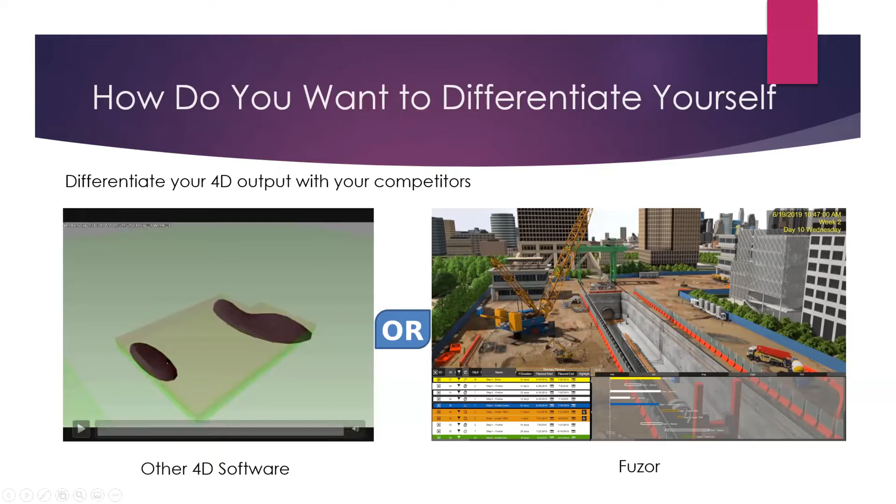Presenting the traditional 4D software, or the one created by Fuzor with full details.

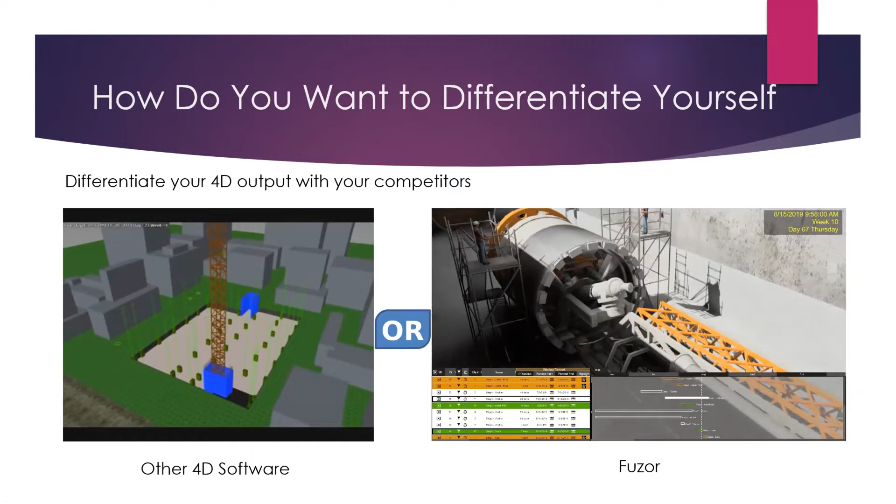Okay, now you may be thinking, oh, I'm given a tight deadline. I don't have enough time to add more details. It is correct if you are using the traditional workflow.

Older workflow requires multiple software throughout the VDC project lifecycle. You use Navisworks for construction sequence simulation, 3ds Max for animation, Lumion for rendering, After Effects for video editing. It may be fine if you don't make any changes. Yet, it is very common to have schedule and model changes. It is very time-consuming and frustrating to go through the whole process of each modification.

It is totally possible to increase your efficiency and productivity by using the all-in-one VDC software, such as Fuzor. You can use Fuzor to create detailed 4D simulation, method statement simulation, site logistic planning, project cost simulation, construction progress tracking.

When comparing to the traditional VDC tools, Fuzor has a stunning graphic to present your 4D simulation to clients clearly. It has a quick and easy equipment animation workflow to save time and cost. It can create 4D with high level of details. It is very user-friendly. You can also learn it quickly.

It also accommodates the needs of the latest developments such as VR and AR. So Fuzor is not just for now. We also take care of your future developments. It also handles large-scale projects. More importantly, Fuzor helps you to win more projects.

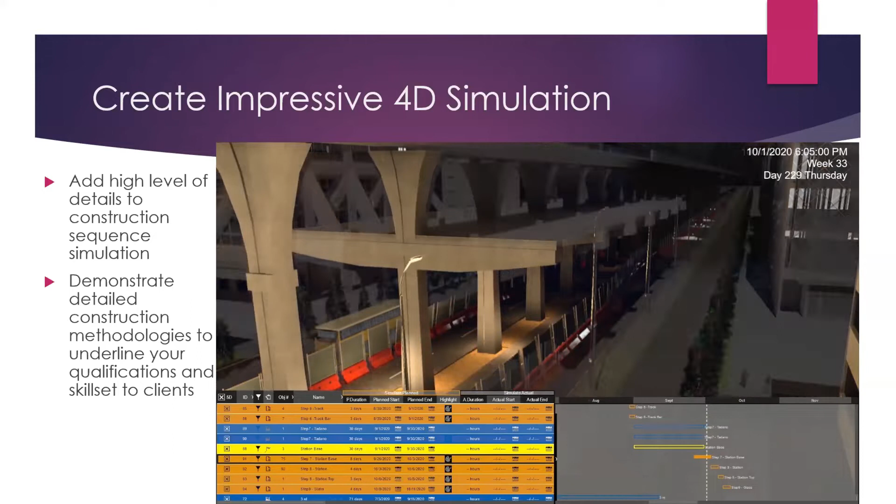Fuzor has a full toolset to generate the deliverables for your projects. Let's go through the Fuzor 4D workflow.

Interoperability of data among various software is always a challenge. You don't need to worry about it when using Fuzor. Fuzor has a good solution to handle it. It doesn't matter if you are using Bentley, Autodesk, or any other tools. Fuzor has a workflow to work with them perfectly. Other speakers will share with you the details.

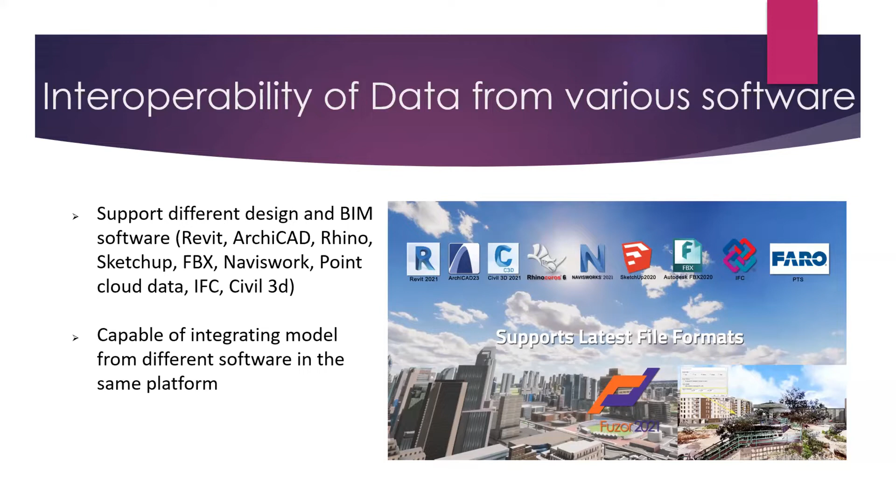Fuzor has a seamless integration with P6, Microsoft Project, and Power Projects. You can load the schedule to Fuzor through XML with all the logical links. You can continuously update the schedule and maintain the linkage between the tasks and 3D models. If you don't want to load the schedule, you can create the schedule from the 3D model within Fuzor.

There are various toolsets in Fuzor to help you select and filter objects quickly and easily. You can use the Auto Assign workflow to help automatically assign objects to tasks. The object filter system of Fuzor is also really robust, letting you set rules to filter the objects.

It is just super easy to learn and create animation in Fuzor. Let's see how you can create a mobile crane animation in 2 minutes.

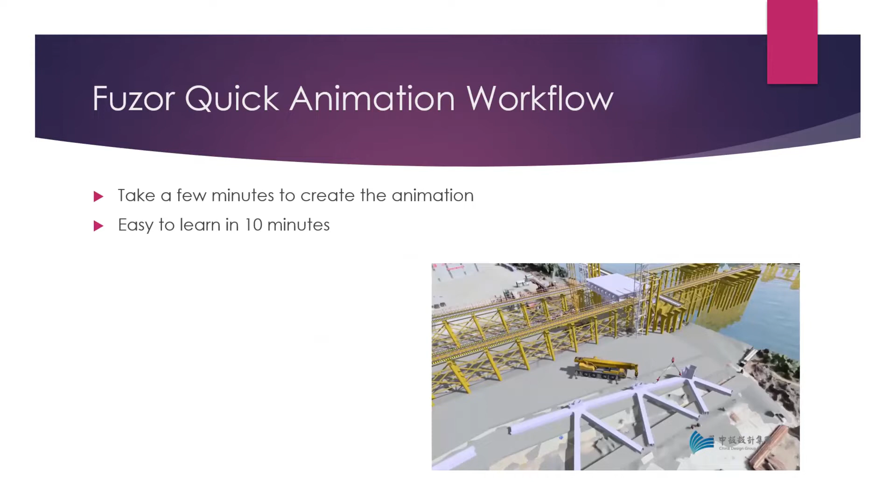Okay, so the first step is that you can create a staging task, and then add the structure framing to the ground. Then you can go to the Fuzor content library and search for the LTM, the mobile crane.

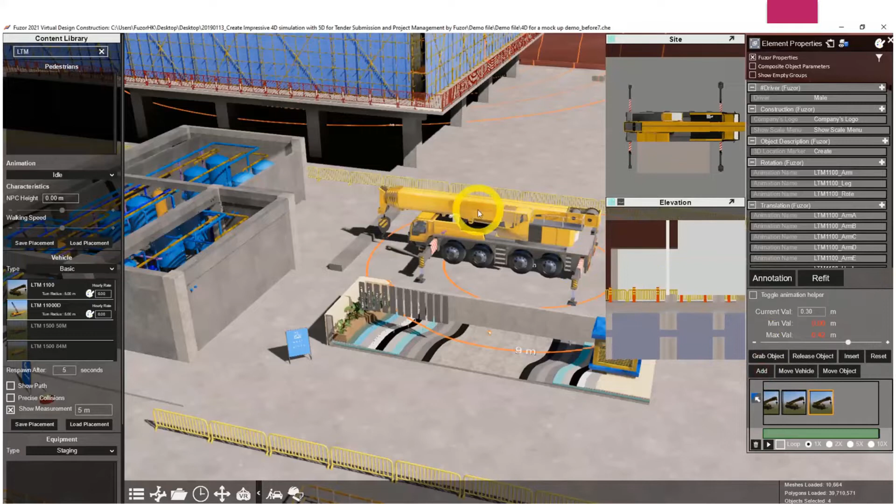For each equipment, it is based on our actual catalog. You can use the rigger flow, select the telescoping section, and adjust it. Then for the operation of the mobile crane, you can see it show the working radius as well, so you can check whether it will crash with potential items or other equipment.

Okay, you just add a keyframe. In order to help you locate the position precisely, there are other windows as well, so you can view it from different angles. This is a top view, and also the elevation view.

After you finish the animation, you can create an equipment task and turn the animation into simulations. This controls when this mobile crane will operate, supporting precision up to minutes or seconds. You add it to the equipment task, so the mobile crane will operate starting on the start date and complete on the end date.

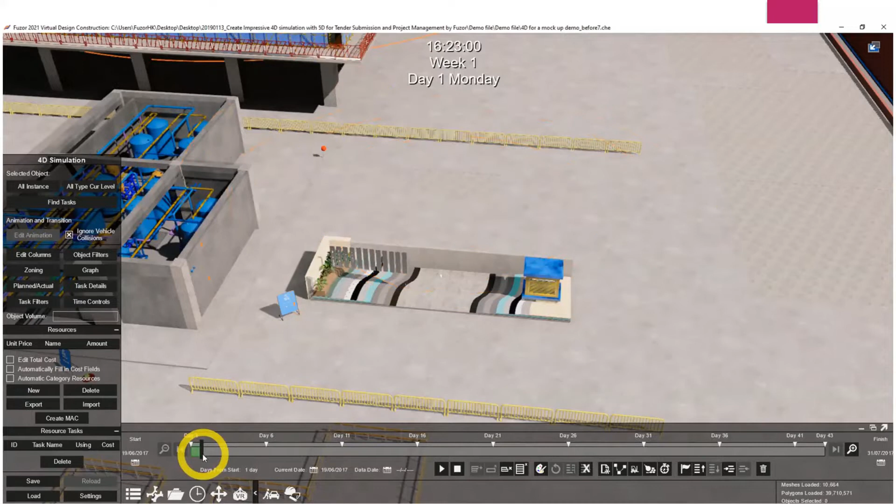So why can you do it so quickly? It is all because Fuzor offers an extensive construction vehicle library that comes with adjustable animation. The equipment is modeled based on the actual catalog. Not only can you use it to create method statements, but also to simulate the operation of the equipment on the construction site. So this is an example.

Check out this video, how you can simulate the operation of the excavator from the driver view. You can find the panel to control different parts of the equipment, same as the real equipment.

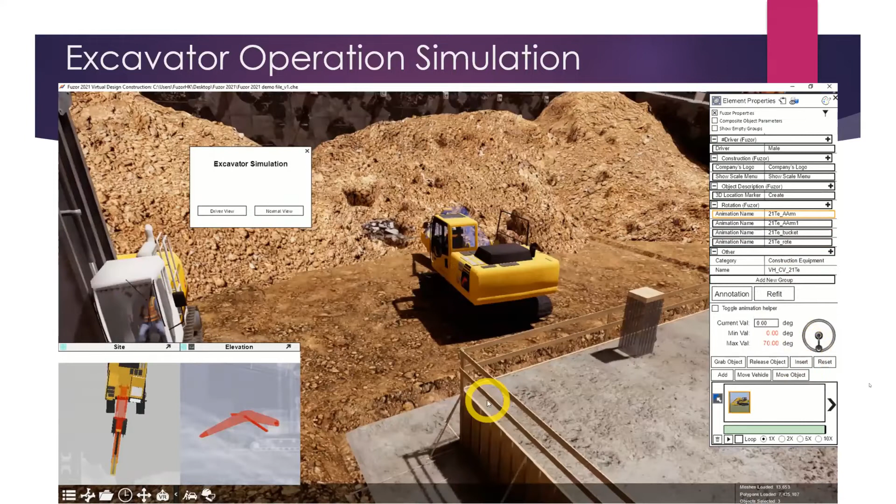There is a lengthy conversion process. If you use the traditional animation workflow, it requires years of training and the rendering time is very long. The Fuzor animation is 40 times faster, as you don't need to do rigging or bind skin, and the rendering time is a lot shorter.

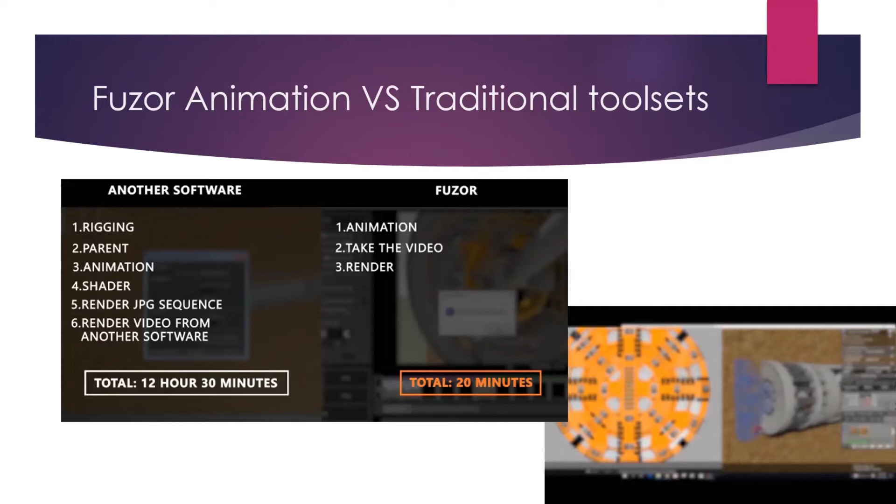You may have a question: can you create animation for your custom equipment? Yes, you can use the Fuzor sequence animation and multi-track tool to create and build up your own animation library. Again, you can learn it in 10 minutes, and no animation knowledge is required. Here is an example of how you can create multiple animations of the RCD and reuse the animation in different projects.

So you can create multiple animations of the RCD here using multi-tracks. Then you can create different sequence animation tasks to control when the animations play. After you finish the animation, you can save it, and then load it into other projects to reuse it.

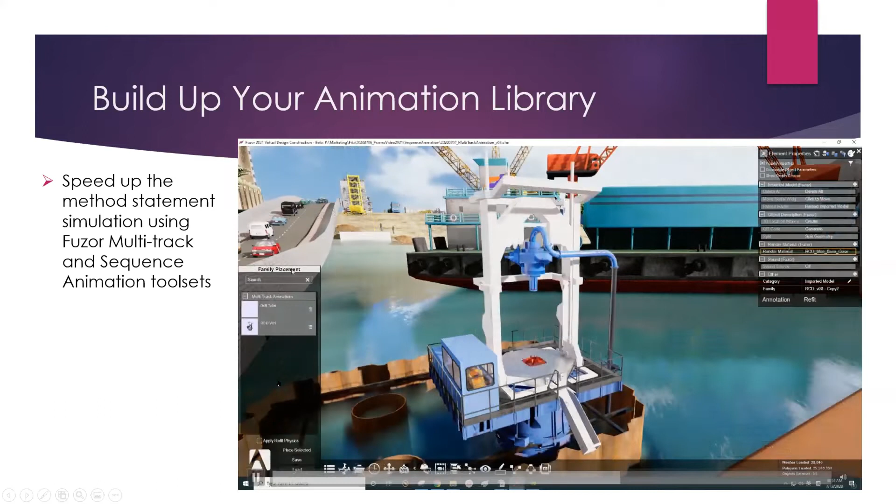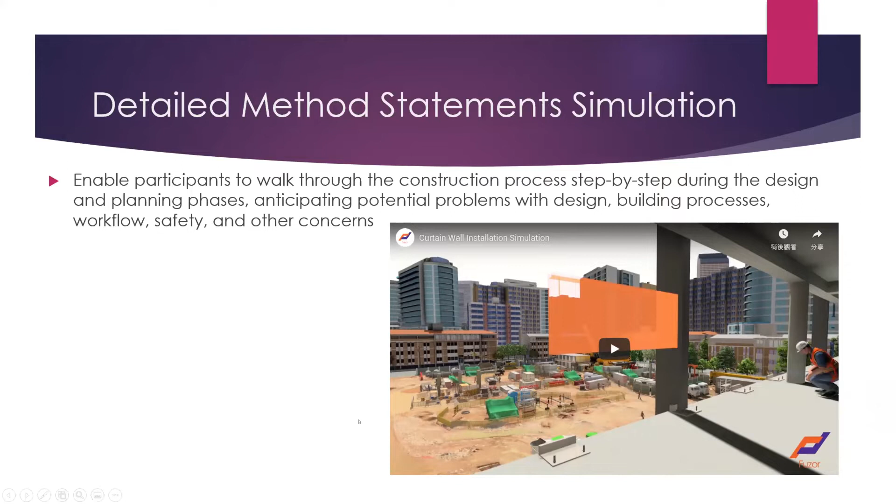Creating detailed method statement simulation is hassle-free in Fuzor. You can anticipate potential problems with design and building process, workflow, safety, and other concerns by enabling the project team to walk through the construction process step by step during the design and planning phases. We have an example to show you the curtain wall panel installation.

There's a built-in advanced cinematic editor that helps add necessary annotations and render out high-quality 4D video quickly without going through other video editing software. So this is the precast wall installation.

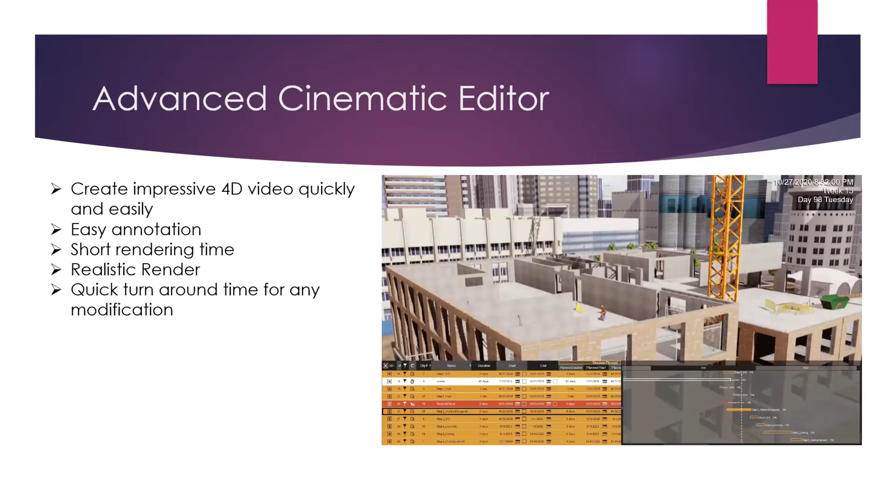Is there a better way to differentiate your deliverables from your competitors? Have you ever considered generating a free self-executable viewer to share with your clients? For this viewer, no installation is needed.

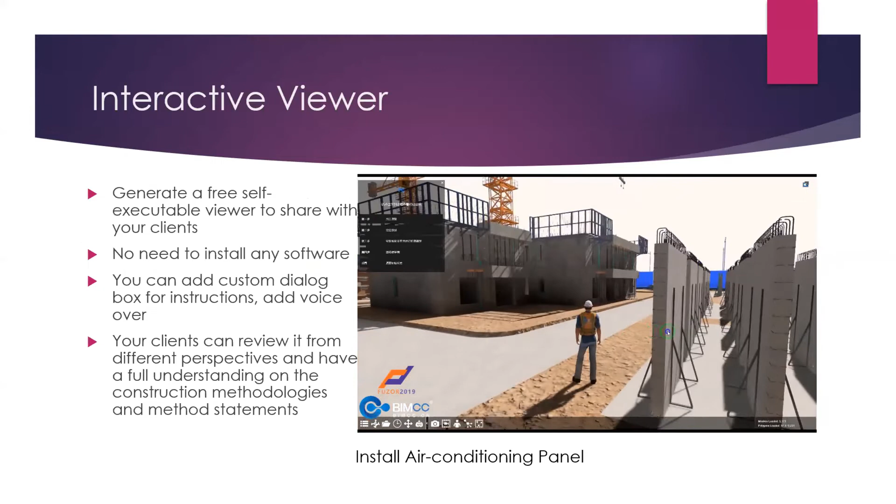You can add custom dialog boxes and a voiceover to give more instructions, guiding your clients through the method statement. Your clients can view it from different perspectives and gain a full understanding of the construction methodologies and method statements. You don't need to create multiple 4D videos just so they can view it from different angles.

Good site logistic planning ensures the construction materials arrive at the site on time. So this is one of the simulations, and also the illustration to showcase you.

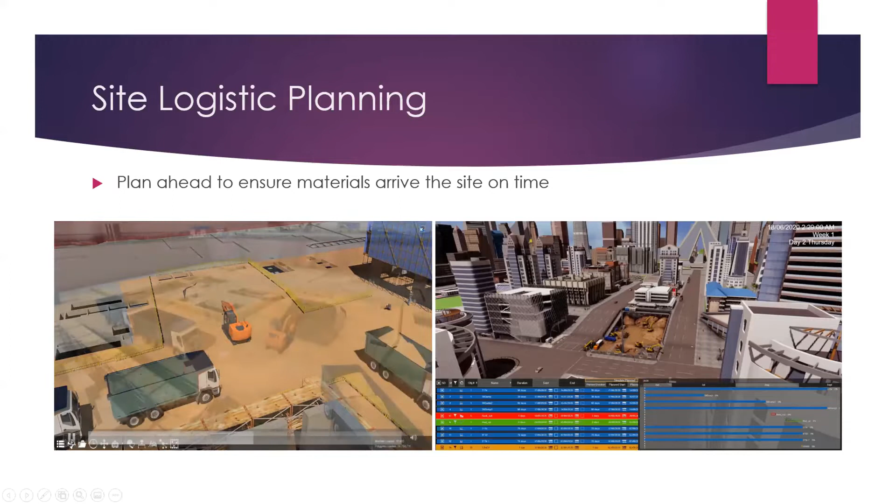Resources planning and accurate cost estimation are important for your bidding process.

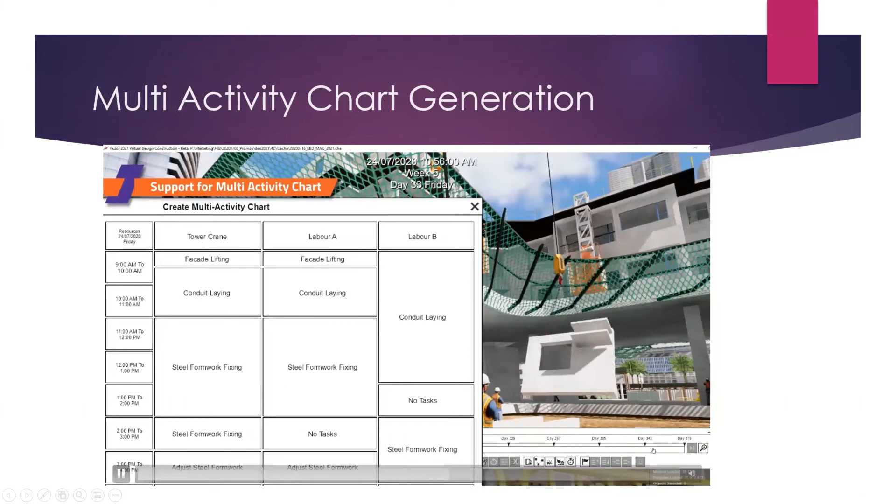Fuzor generates a multi-activity chart to give you a quick view of the idle time of construction workers and machines. You can reallocate activities to achieve the optimum mix of resources. Fuzor doesn't just generate multi-activity charts through PDF, you can also produce simulations using the 4D.

You can use the selection report to extract data from the 4D model to calculate resources needed for different activities and perform other analysis. I know you can use Revit to extract quantities, but you can also better utilize the 4D models. You can extract all the data from the model itself, for example the volume, area, length, materials, and so on. So this is a quick video to show you how you can use it.

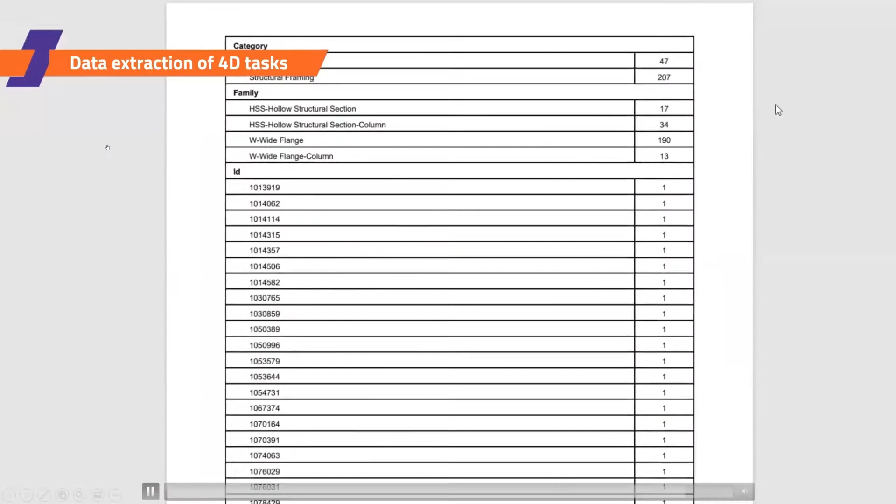You can select the task, and then there's a selection report in Fuzor. It will show you the reports, and then you can load it into other software, for example Excel, to do the calculation.

You can use the Fuzor bidirectional live link to resolve clashes before construction, so rework can be minimized. Export detailed clash reports to share with colleagues. Streamline clash tests using our award-winning bidirectional live link to resolve clashes in real time.

VR safety prevents delays and injuries during construction. Fuzor offers an immersive and realistic experience for construction workers to identify and fix potential hazards before construction. Let's check out the video.

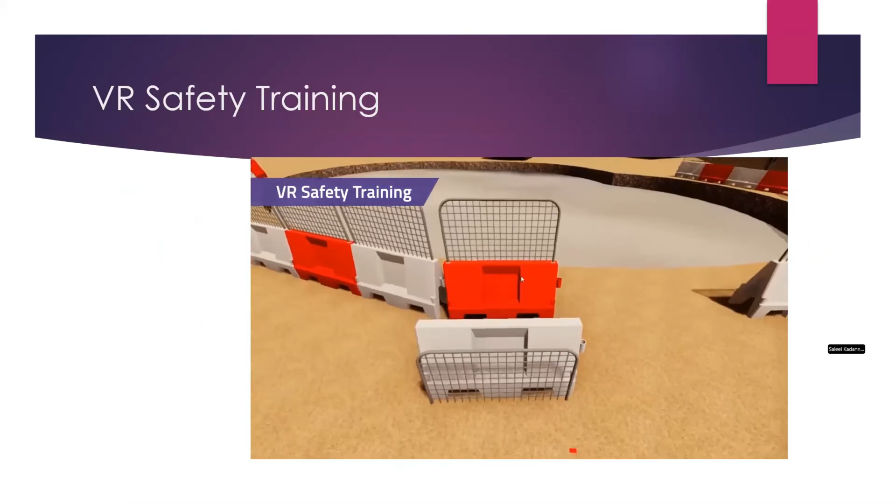Enter VR with one click to start a VR safety simulation. Create interactive prompts for safety training scenarios. Show installation steps, statement of methods, toggle 2D drawings, and more. Enter.

Different types of VR safety training applications can be developed using our Event Checker. Create VR or PC training scenarios in 2 steps. No need to write a single line of code to create fully interactive safety training.

Event Checker is programming without coding. You don't need to use any script or programming language, so anyone can learn it and use it.

Project feasibility is a key factor in keeping a project on track. How can you do better for project control and management?

The planned and actual 4D simulation helps your clients understand the progress by visualizing the deviation, so the project can plan to catch up. In Fuzor, you can load the planned and actual schedule as well as the cost data to produce the S-curve.

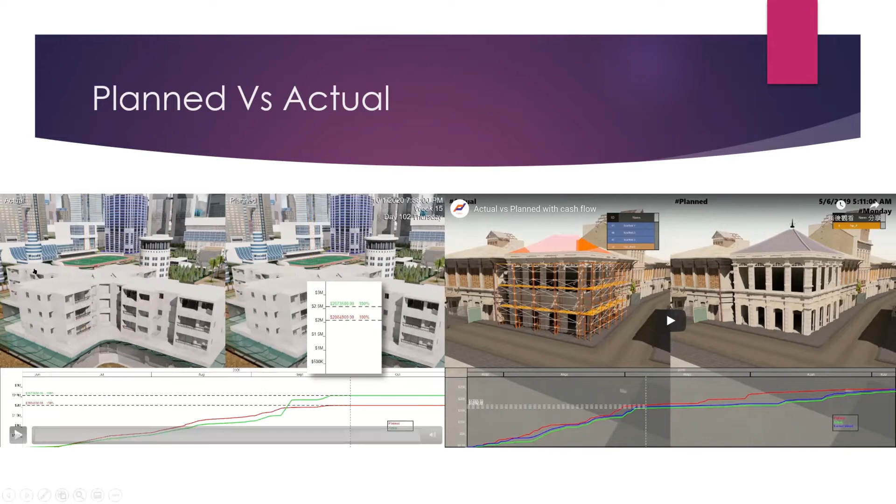If you would like to know the percentage of completion for tasks, Fuzor supports progress updates and data date. Let's see how it works. There's a data date button, you can simply change this date to that date, and it will update the progress for you.

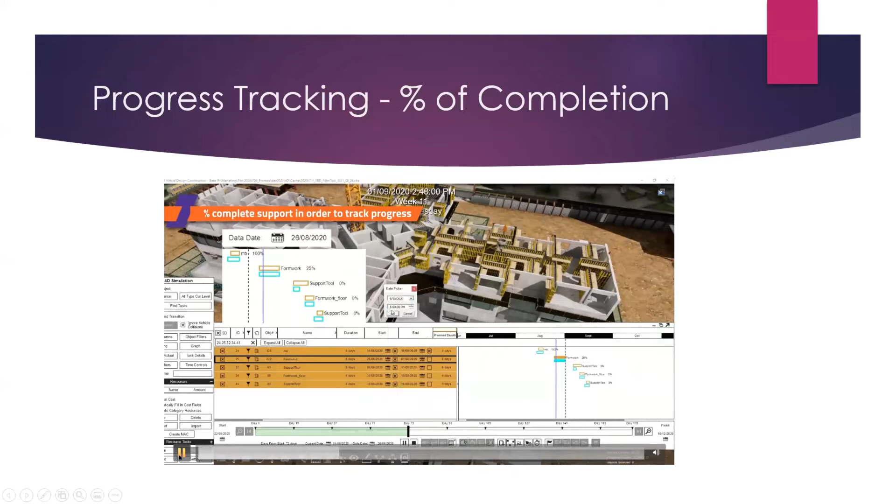Being able to visualize the critical tasks helps to set the priority for your projects. You can know the amount of float in your schedule. If you use Fuzor, you can visualize the float using the color highlight function. Here is the setting.

The real-time collaboration platform of Fuzor allows stakeholders in multiple locations to interact and discuss the project in real-time through the internet. It is a very good tool set under COVID-19 when people cannot meet physically.

You can also download the Fuzor app to develop a paperless defect checking system. You can use mixed reality to project the virtual model on the actual construction site to rehearse the installation work. Let's see how it works.

QR codes align the 3D model with the real world. You can view 3D model data while on site, isolate a hallway, and review each 4D task in sequence, showing the next task, today's date, and last date.

QR codes align the model with the real world. The digital twin application will continuously update the real construction activities, so problems can be captured earlier and you can react and resolve problems quickly. Fuzor API is available for custom digital twin application developments.

I hope you have a better understanding of what Fuzor offers for digital construction management. If you're interested in adopting Fuzor for your VDC workflow, you can contact me for further discussion, and you can find my details below. I think that's it for my presentation. Thank you.

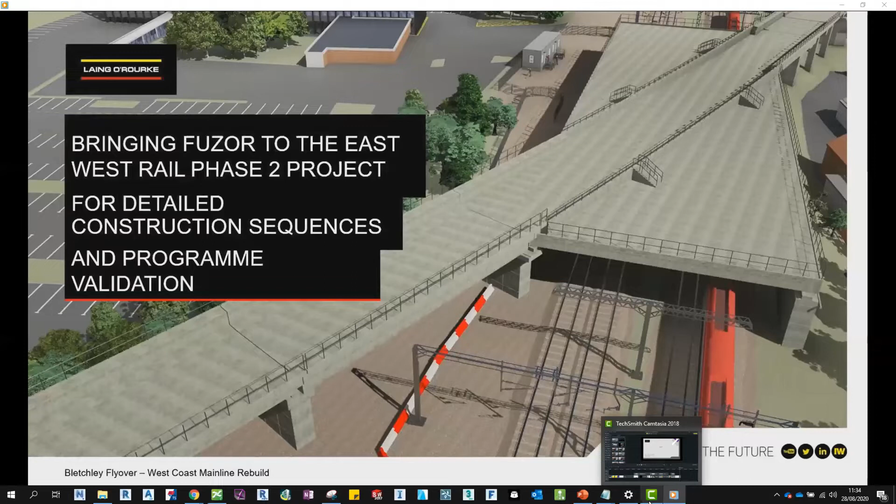First, I'll quickly provide some background on East West Rail, which is a major project to establish a strategic railway connecting East Anglia with central, southern and western England. In particular, building a line connecting Oxford and Cambridge via Bicester, Milton Keynes and Bedford, using the track bed of the former Varsity line, which has been out of service for many years.

I work as part of the delivery team on Section 2C, which is responsible for dismantling the Bletchley flyover, a reinforced concrete railway viaduct built in 1959 to carry the former Varsity line over the West Coast Main Line in Bletchley. So I certainly wasn't the first person to be using Fuzor within Laing O'Rourke.

The first time I encountered Fuzor was at an in-house digital engineering event where the software was being showcased for its straightforward VR capability. I was really impressed with how easy it seemed to be to bring the model directly into Fuzor and be immersed in VR at the click of a button.

I could see its potential for stakeholder engagement, along with conveying safety messages clearly to the site teams in a fun and engaging manner. However, upon receiving the license and having a bit of a play with the software, I soon realised it had potential to do substantially more.

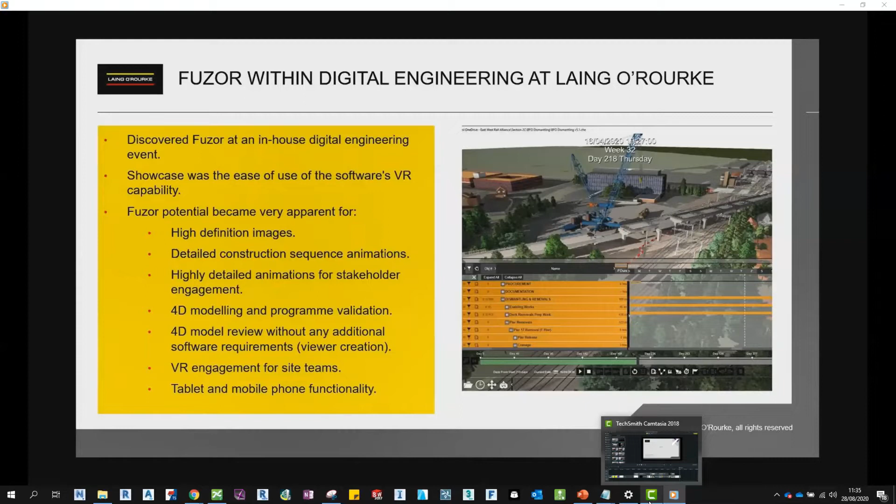However, after speaking with a colleague showcasing the event, I knew there would be some challenges in terms of the format of the design models in the project and creating a viable workflow, particularly with this being a rail project and not a sort of traditional construction project.

Rail projects traditionally use the Bentley suite of software whose outputs are in DGN format, and I knew Fuzor had bidirectional associativity with a range of Autodesk and Graphisoft software, but it didn't work directly with any of the Bentley outputs. However, the DE team had previously ironed out the process for converting DGN files to IFC and importing these into Revit. The surveying team had also created their digital terrain models in DWG format, which could also be brought into Revit very easily and cleanly and converted into a topo surface.

The project already utilised a range of modelling software, and it soon became clear that these could be used to create an effective workflow for Fuzor outputs. In the first instance, an IFC was created from the AECOsim or Microstation model, which could be imported directly into Revit. However, there were issues where some of the geometry had faces missing or cuts were coming through with solids.

Using ArchiCAD's excellent IFC export capabilities, the broken models could be fixed and exported again as IFC to be used within Revit. There was also the ability to utilise ArchiCAD to generate the Fuzor models, but the topo tools at this particular point in time were required initially.

Once the model was set up within Revit, it was a simple process to generate the Fuzor model. Because Fuzor accepts FBX and SKP files so readily, it was so easy to model any components that weren't available within the Fuzor standard library, which is pretty comprehensive to be fair. I used SketchUp and 3ds Max predominantly to create additional models, and there was a wealth of models available within 3D Warehouse, which was incredibly useful.

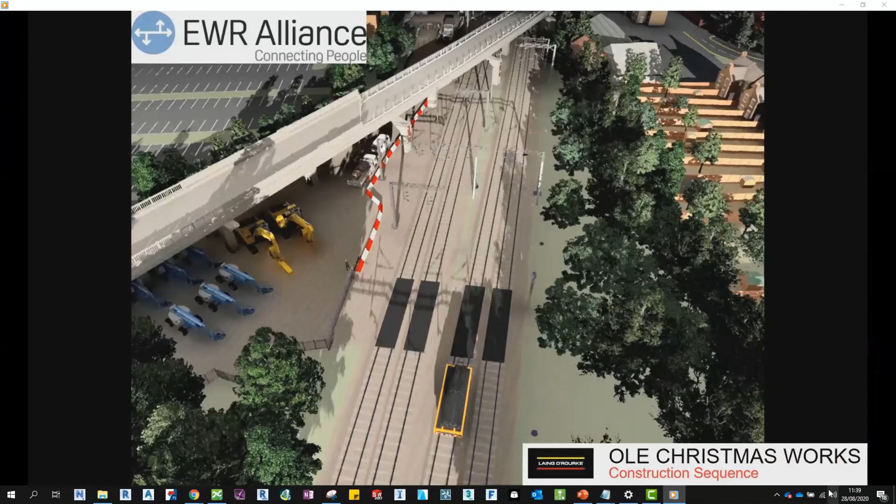So this particular video extract was created to show the sequence of the new OLE installation, the overhead line electrification, and the software was absolutely key to showing the exact procedure where track possession meant that time was of the essence. Some of the plant used were standard components within the Fuzor library, which were incredibly easy to use.

As Grace demonstrated, the grab function is one of the most useful animation tools within this software. But the ease that you can actually animate non-Fuzor items as well meant Fuzor really is my go-to software for quick animation. This particular video was used many times on site to make sure the teams knew exactly which lines had activities that ran concurrently.

The fact that it was exportable as an MP4 or could be viewed as an interactive model using the viewer generator, and also being able to use them on phones and tablets, meant that access to this information was quick and easy, and the site teams expressed how helpful they were.

This is just showing the piles going in, the Movax and hammer. So this has been shortened down because there were quite a few that were fitted along the line, and I think some of the activities with the piles were running concurrently, so it was important to see which lines were being used at which time.

I think there's the Movax, the hammer there, so the Movax, sorry, and the trailer. So the Movax is a Fuzor item, and the trailer was an item that I modelled and just dropped in, so it's quite easy to put the animations together.

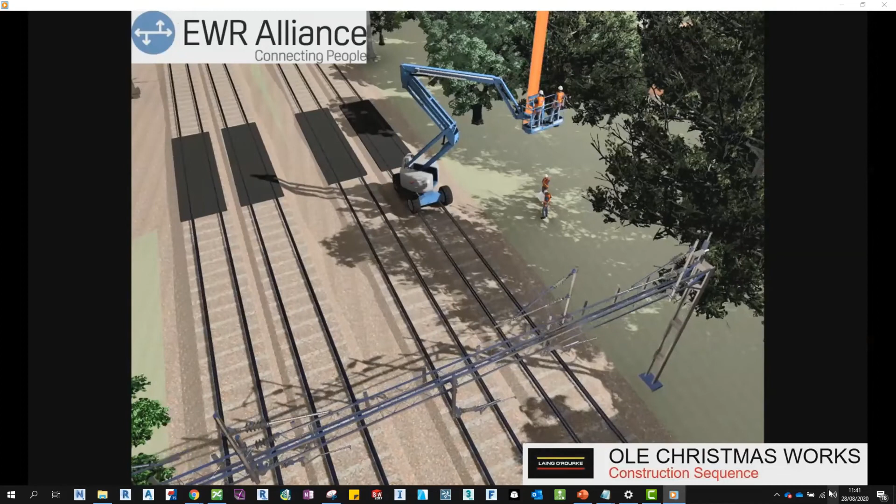And this is just showing the new structures going in.

Where the bridge was being dismantled, because it's so old, there have been animals roosting, particularly bats, which are obviously protected. The ecology team approached digital engineering wanting a quick model created along with an animation to show bat presence using a colour-coded system. Red sections are no-go areas, yellow were potential roosts, and green was clear.

With it being such a quick and simple process to change the material properties of the bridge beams, I was able to quickly create a model and animation that clearly showed which parts of the bridge could be worked on without disturbing the bats. This entire process took probably an hour or two, just to quickly change the materials, check it with the ecology team, and create the fly through and the viewer. Really, really straightforward process, and they seemed very happy with that.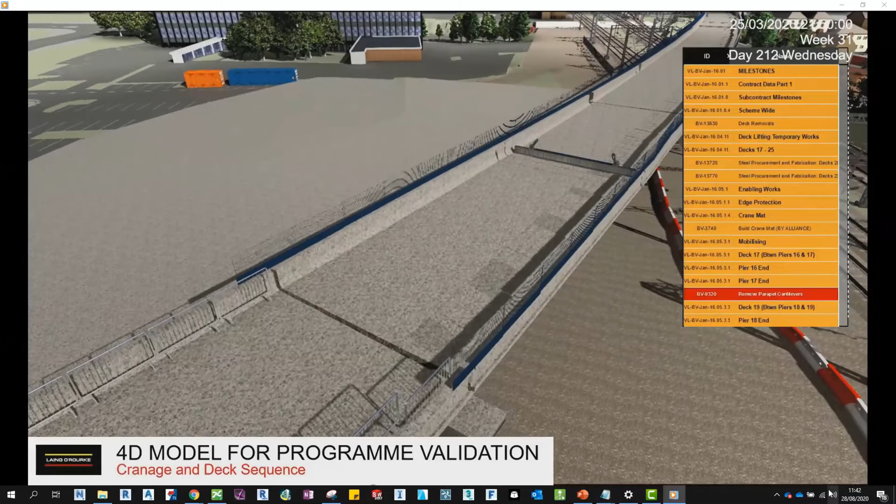With the construction programme having been put together at this point, there was a requirement for the planning team to be able to have the programme validated and look for any issues with the sequence. It was a straightforward process to bring the programme in XML format directly into Fuzor and associate the tasks with the geometry, then create the subsequent animations to clearly show the sequence.

There was also the added benefit of the viewer creation tool within the software that allowed the entire model and sequence to be exported as an exe file, which took not only the 3D geometry but also the programme, allowing users to adjust the date, take measurements and annotate. It also became really useful for members of the team to take their own screenshots for their own communications.

There's also a quick extract after this showing the ALO hoarding line and the activities that would be occurring while trains were running down the track, and obviously that was key from a safety perspective.

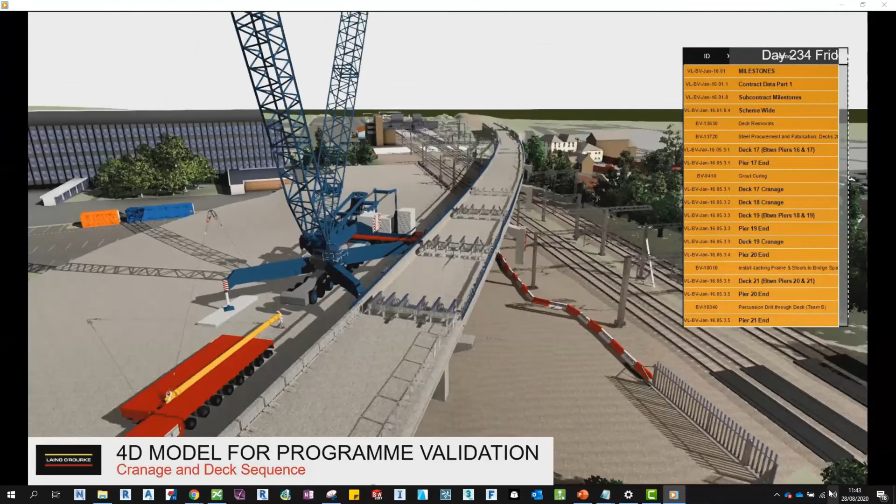So obviously 1,000-ton cranes don't move this quickly, but it was really, really useful to show the sequence.

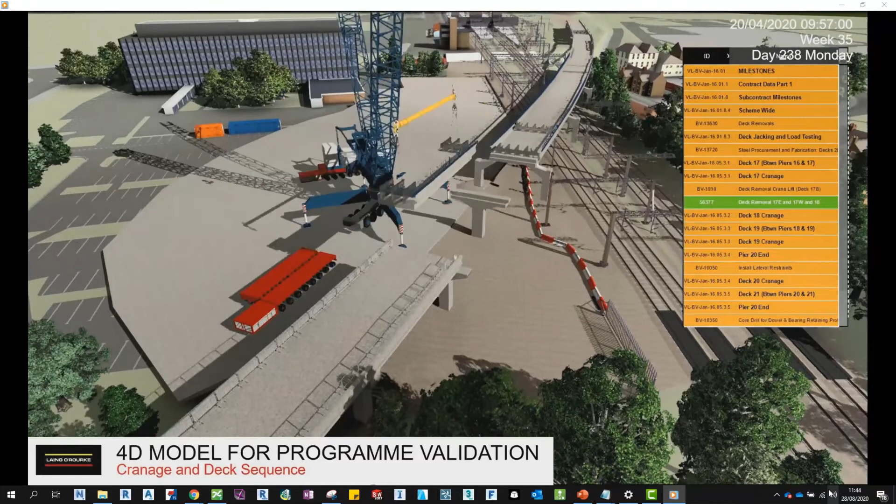This is the ALO, so ALO is all lines open, just to show some of the activities and the trains whizzing up and down the track with the ALO hoarding line in place. Again, the context environment there, so the houses in the background - a lot of those came off 3D Warehouse, a lot of them were just easily put together in SketchUp.

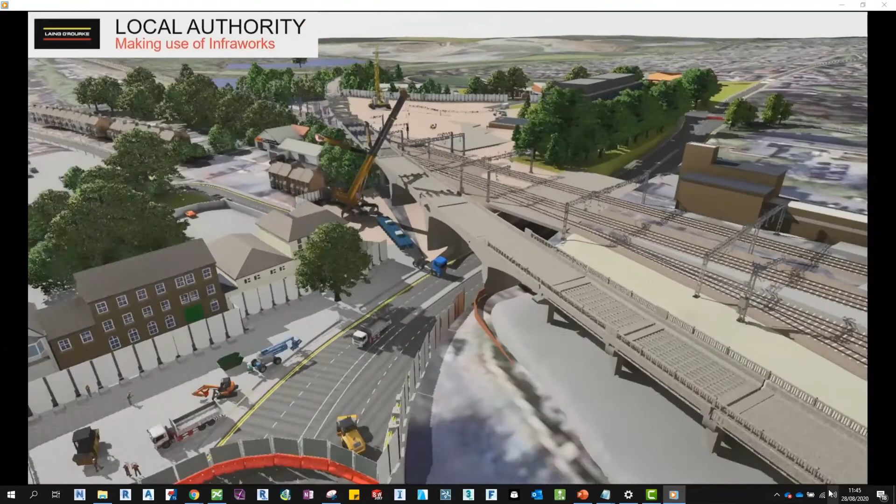This particular animation, where the works involved regular transport of the dismantled components along a public highway, it was felt that our animation would really help local authority and the wider team understand the process. Using InfraWorks, I created a larger tile with the roads accurately located in place. It's not very easy to do roads in Revit - well, I found it particularly difficult.

With the ease that Fuzor can accept an FBX file, it was really straightforward to drop in. This is a very large FBX, a very large tile taken from InfraWorks, but it dropped into Fuzor without any problems, and the software handles it. It doesn't lag, it seems to cope with it really well.

As you can see, Fuzor has really helped deliver many of the digital engineering outputs on this project. I found the software straightforward to use, and I find the user interface to be very, very easy. Combined with the excellent support I've received from Grace, Amy, Happy and the rest of the team, it's meant that the learning curve has been relatively painless.

It's also been good fun to use, especially the VR aspect, watching some of the site team hit the deck when stood next to a virtual operating excavator. I really think that the viewer generator in particular is a real gem, which I think has much more potential than I've been able to utilise it for or display in this video, but it's a really, really good feature of this software.

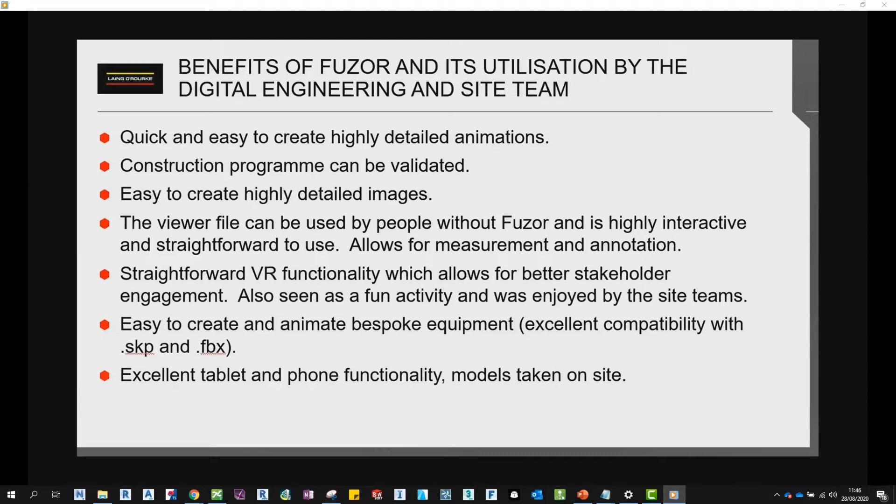Okay, that concludes the presentation. I hope it was useful and thank you very much for your time.

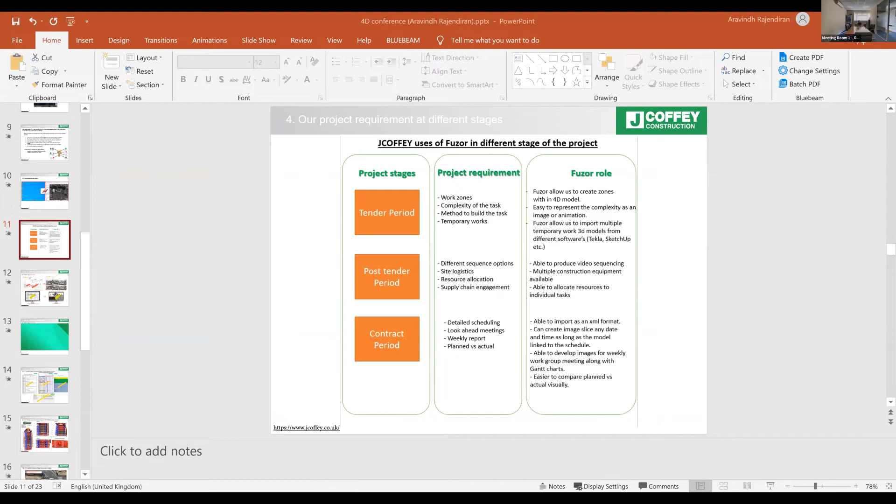Let me start the practical example. Let me show our method statement. Hope you can see the screen. So you can see that this is our method statement which we produced in 2016.

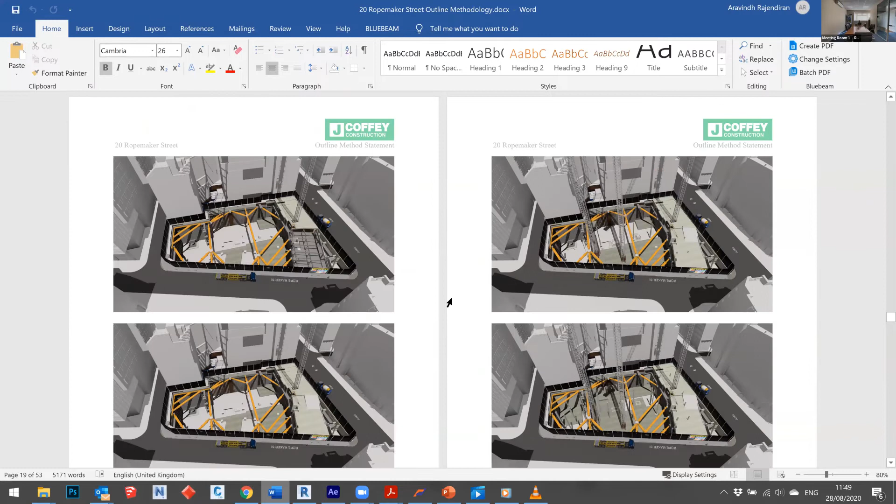If you look at it, you can see most of it is just a lot of words, everything described in text. People are not really interested in reading all those words, especially clients who don't know anything about construction. So how did Fuzor help us? We're able to create images of time slices within minutes. Our methodology improved by adding a lot of images, and it's self-explanatory, showing everything in detail clearly. As you can see from the methodology, everything is in detail so you can understand rather than reading all the description.

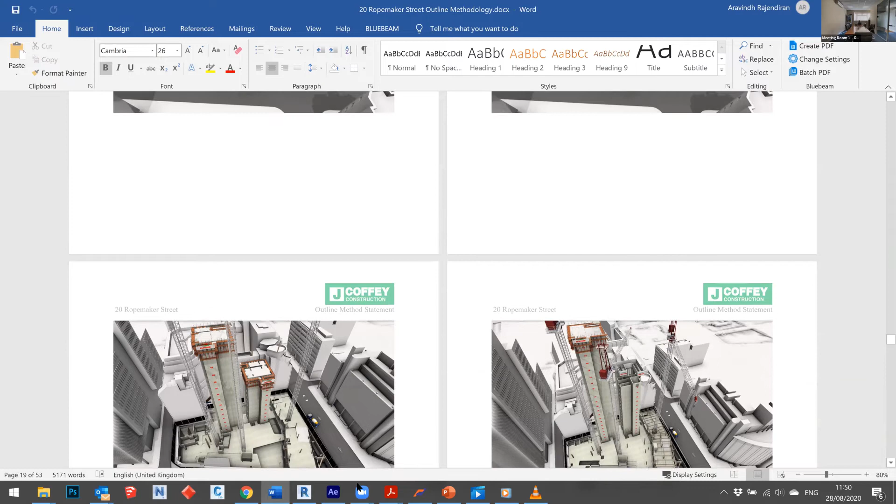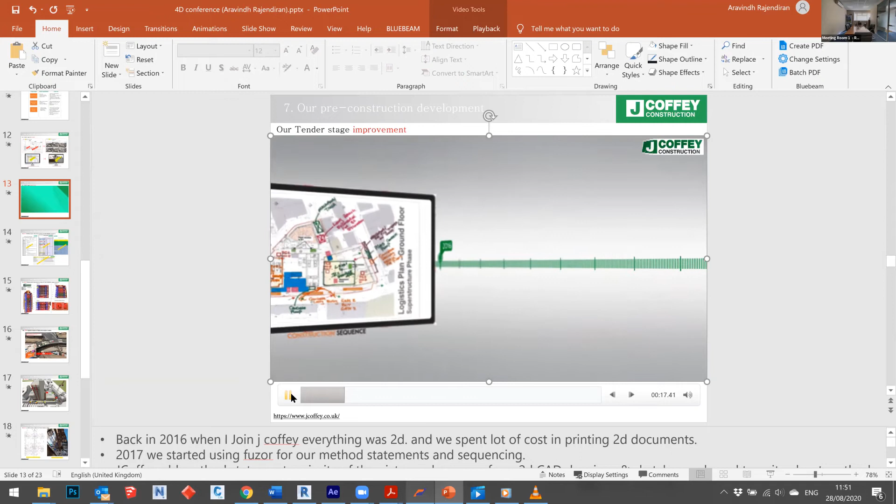Next, I'm going to show you a quick example of our individual sequence and how we use Fuzor. This is a great example of how we improved from 2016 to 2019. In 2016, most of our presentations were based on wordings and just 2D sketches. After 2017, once we started using Fuzor, we could do animation within minutes. It's a lot easier, and not only that, you can bring a lot of different software models into one platform, making it easy to coordinate. It's a very good software.

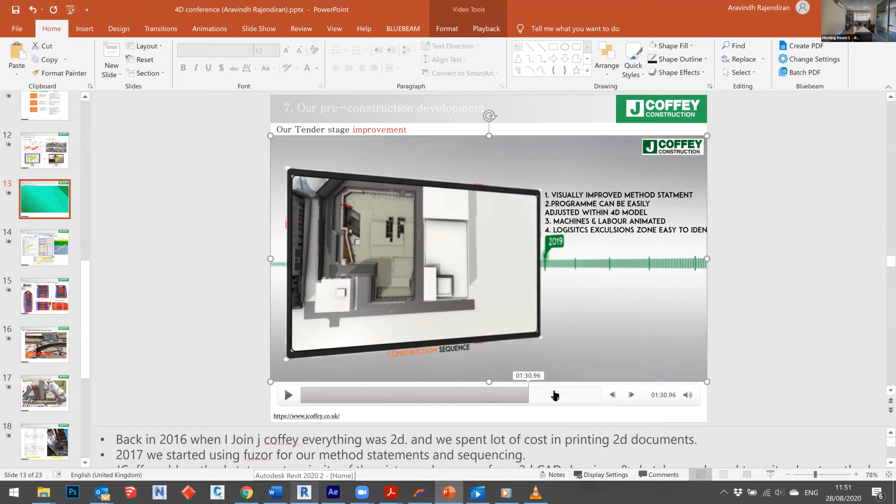Hope everybody can hear me or no? Yes, we can hear you. Aravindh, would you mind clicking the PowerPoint to full screen so that we can have the... Okay, that's good, that's good.

And I'm going to show you... yeah, can you see the video? So that's a typical wall sequence that we produced using Fuzor. Everything just from Fuzor.

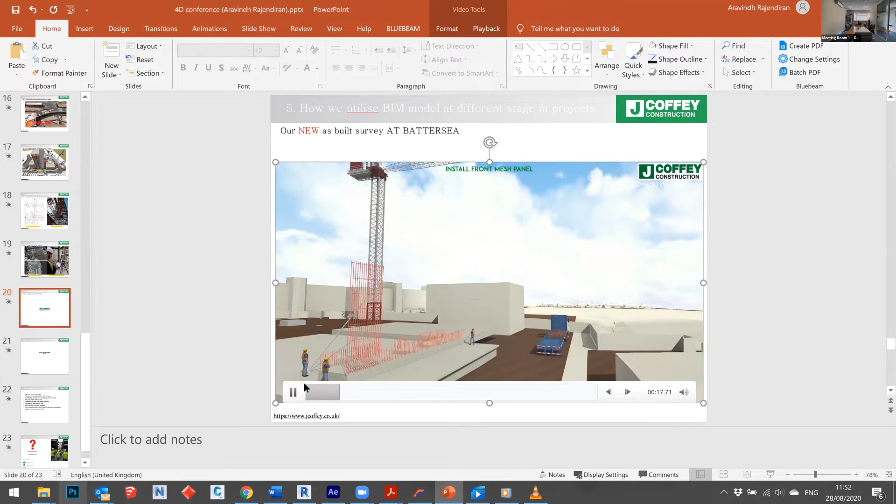I'm going to fast forward a little bit. If you look at it, there are a lot of individual components coming from different software, all pulled together in one single platform, which is Fuzor. It's easy, the animation is a lot quicker, so people can understand on site.

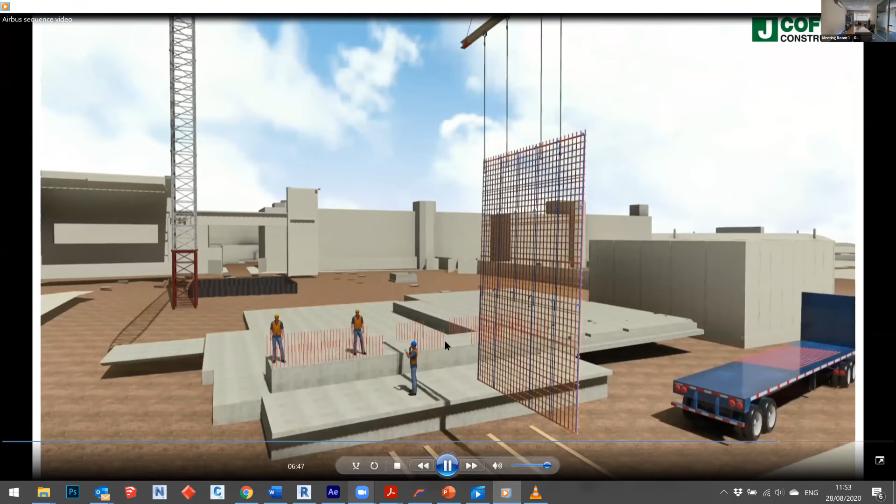So I'm just going to show you this is what we planned on site, and I'm going to show you what we've actually built on site. So you can see there, I can show the comparison of what's planned and what's actually built. As you can see, during our tender stage this is what we planned and this is what we built, which is fantastic. So people know what they're doing on site rather than just looking at...

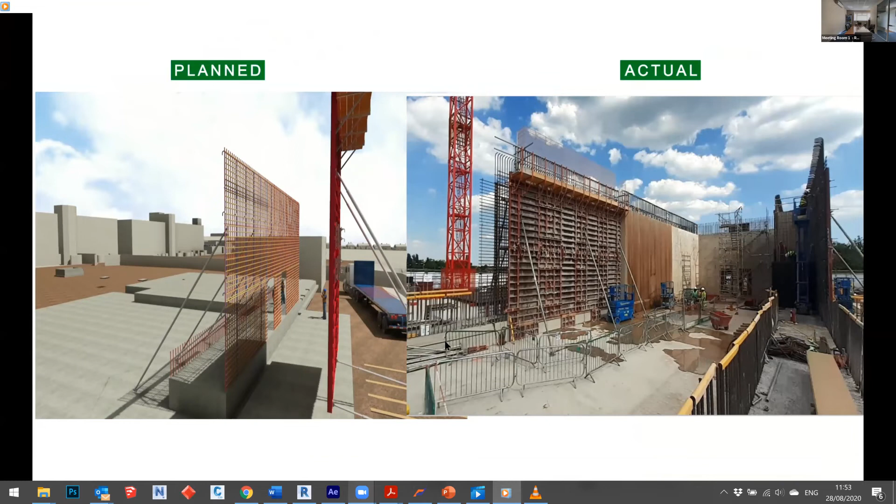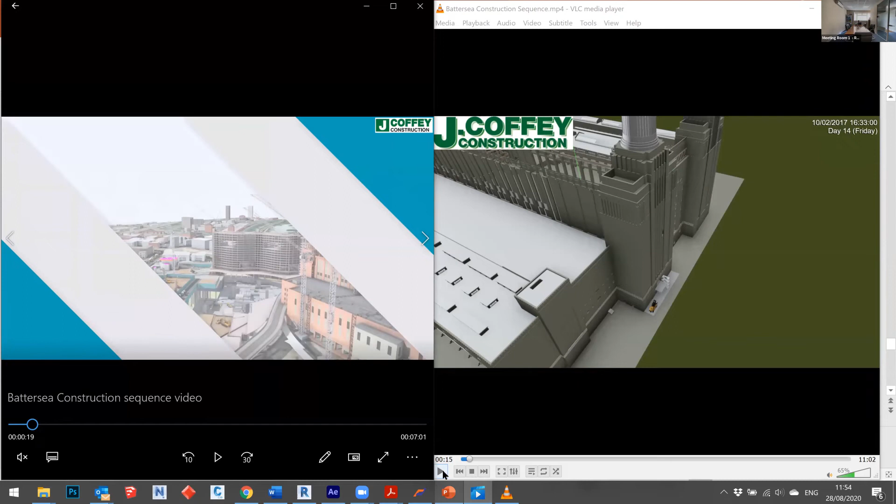That's the comparison. The next thing I'm going to show you is one of our first jobs that we built using Fuzor, and this is one of our recent jobs. Both are the same project, but I'll show you how Fuzor improved, a good example of how the Fuzor team is improving continuously. I'm just going to press play.

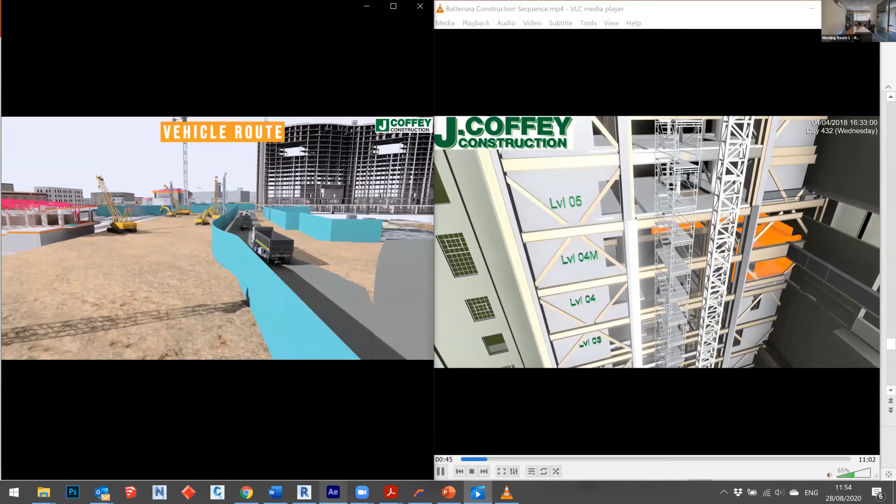So you can see on the right hand side, that's what we built in 2017, and on the left hand side, that's what we built recently. You can see the difference, how much Fuzor improved. They brought new features so you can add annotations, markers, everything within Fuzor, so you don't need to take it into new software like After Effects or Premiere Pro. You can just do everything within Fuzor now, which is great. Every time you need to produce a video you'd need to bring it into video editing software to add annotations. Now it's a lot easier since you can add everything within Fuzor.

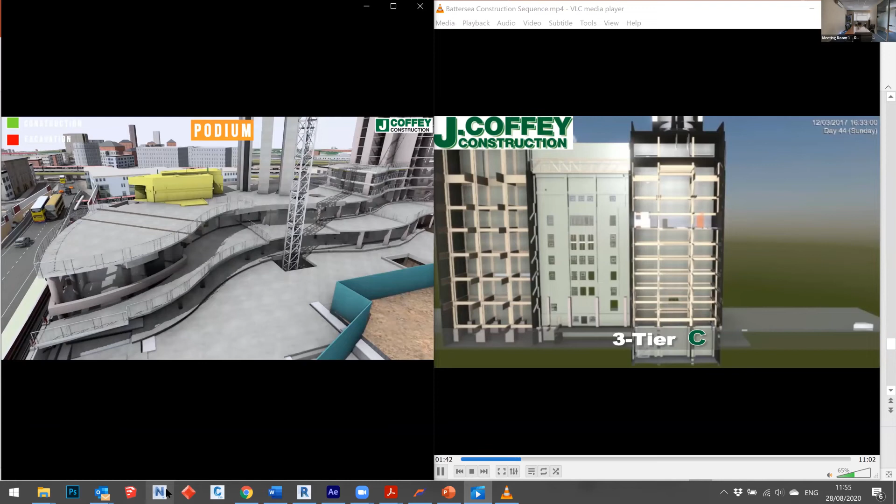I think that's it really, what I'm trying to show. I've been using it for the last 4 years. I highly recommend Fuzor, just go for it. That's the next generation 4D software in my understanding. So just give it a go. Thank you for listening. Good luck.

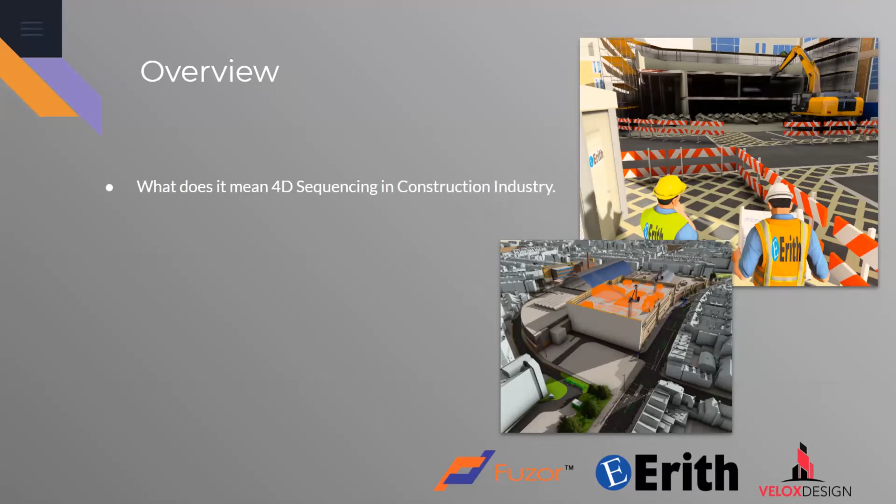I will now give a short overview of the topics I will include: what sequencing means in the construction industry, common mistakes, how to get the best out of 4D, why Fuzor is the right tool, how it benefits the pre-construction team, and how it benefits the clients.

Before I move onwards, I would like to introduce Erith first. It's the company I've been working with for the last few years, and we used Fuzor as the main tool for sequencing. It has been in the business for the last 53 years, with local knowledge and vast experience working in and around London. It has experience of all types of demolitions, small and large projects, industrial, commercial, and city center cut and carve, and of course engineering in-house.

And myself, I've been studying CAD, engineering design, and 3D animation at Greenwich University. I've been in the construction industry since 2013, working on a daily basis with AutoCAD, Revit, Asta Power Project, SketchUp, Adobe, and of course Fuzor. Some of the things I create are 2D CAD plans, 3D scanning and modeling, 4D sequencing, clash detection, and project programming from time to time.

So what does this actually mean for construction in general? I found a really interesting definition of it online. 4D construction sequencing combines 3D models with project programs, creating an intelligent visual construction timeline. 4D construction sequencing services enable clients to gain a truer understanding of their project program, from the initial draft proposal through to program verification on site. 4D adds an extra dimension of information to the project information model in the form of scheduling data. This data is added to components which build in detail as the project progresses.

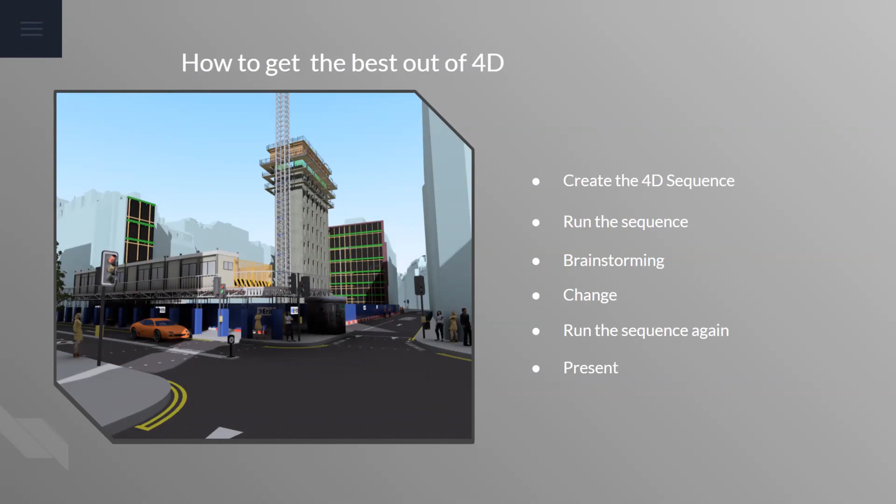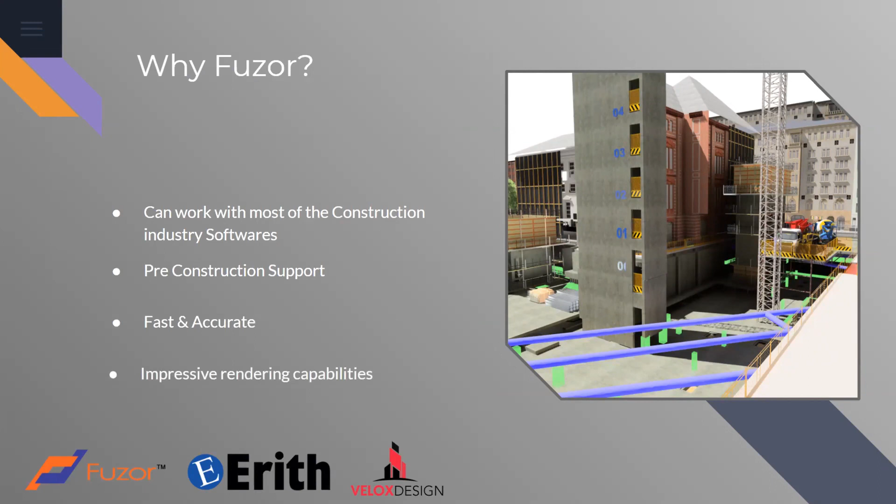I'm going to start with the first one. As we're all aware, Fuzor is adapting to new changes quite often, and basically every year Fuzor is updated with new things that make the software work really well. And of course, the linking - Fuzor and the management team are trying to use Fuzor in a way that we can link with the rest of the construction industry programs. That's why I think Fuzor deserves its place right next to the rest of the programs.

Pre-construction support. As a project evolves, the logistics and detailing can be pushed further with Fuzor. Access and egress, traffic marshal, site routes, site offices, and pedestrian access can all be visualized and accurately proposed and designed, making the project go smoother.

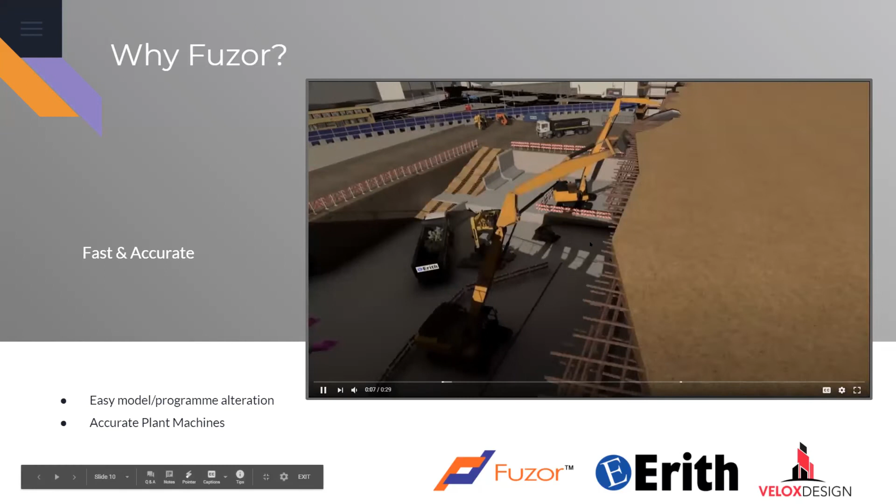It's fast and accurate, and the program alteration is very easy. The plant machines are quite accurate as well. This makes creating the program quite detailed, and also allows us to check the logistics prior to going on site. The client can also see exactly what's happening and what will happen.

Impressive rendering capabilities. This is what I was mentioning earlier when I said that Fuzor can do it all. Besides excellent technical support for the team, the visual graphics are very useful when it comes to transferring information to the client, making it more realistic and understandable.

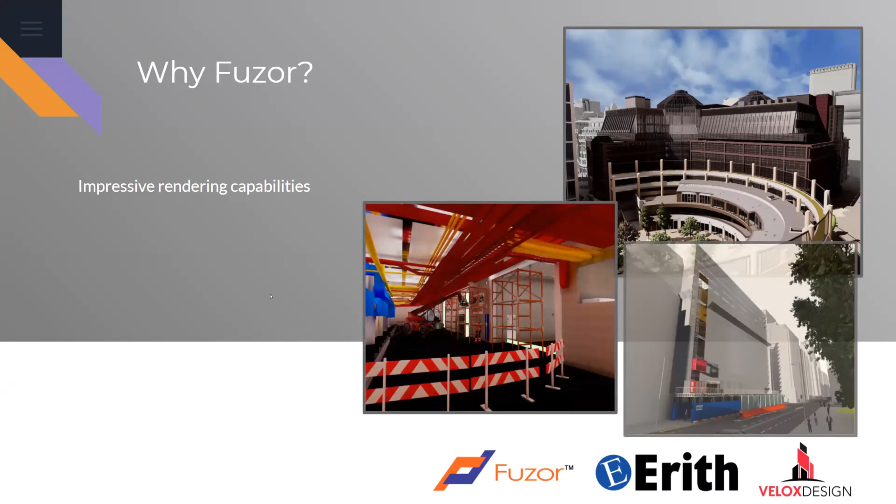And that was it from myself. I hope you guys enjoyed it. Thank you very much. I hope you made a good understanding of why 4D sequencing is very important for tendering awards and why Fuzor is the right tool for it. Thank you very much.